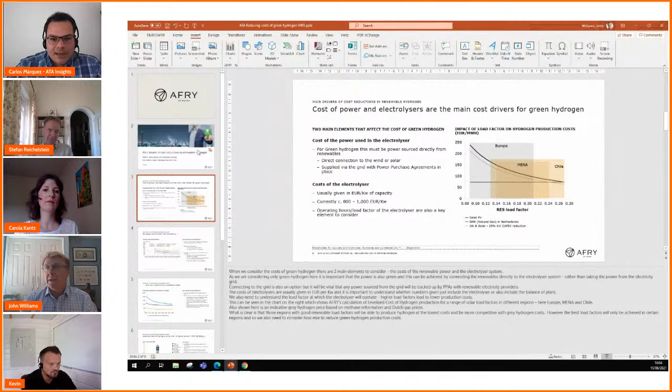Okay. I am just sharing my screen, so hopefully that should be coming through. Yeah, we can see, but we can't see the notes and everything. Yeah, sorry, my mistake. Here we go. That's okay. Okay, here we go. Okay. So, oh no, I've lost it. Sorry. Let me try again. My apologies. It's okay. It happens when you're live.

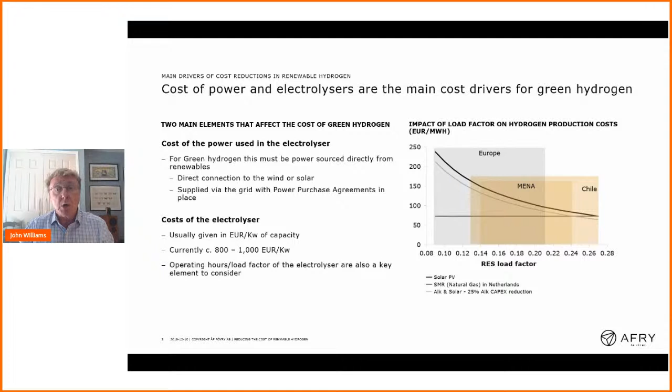However, it's important to remember that the best load factors will only be achieved in certain regions. And so we also need to consider what else we can do to reduce hydrogen production costs. So we expect electrolyzer costs to reduce steadily as a result of the scale up of manufacturing capability and improvements in technology and electrolyzer performance.

The chart you can see here, it's a bit busy, I know, but it shows our cost curves for alkaline electrolyzer capex reductions from 2030, alongside the assumptions used by others, BNEF, IEA, and the EU via the ASSET study. I included both our projections from Q1 and Q2 this year, which shows you how quickly our assumptions are changing as new information becomes available. Other types of electrolyzer, PEM and solid oxide, will have different cost reduction curves, and whilst more expensive today, should show steeper reductions in costs as those technologies develop.

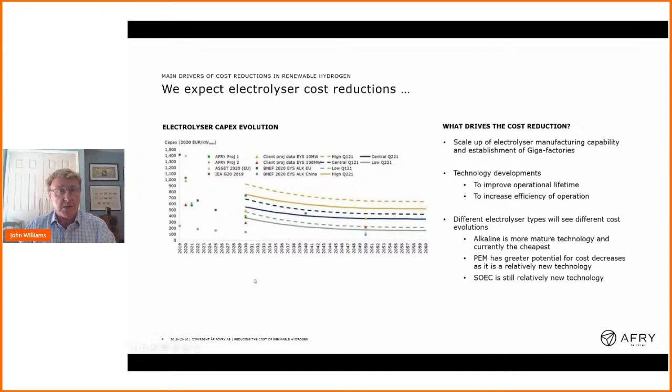So in addition to the electrolyzer costs, we also expect cost reductions in the capex required for renewables. Here we show our central scenario assumptions for solar, onshore and offshore wind out to 2060. The most significant reduction is in offshore wind costs, driven by a number of factors. Firstly, onshore wind is more established, so we've seen some of the cost reductions there already. The potential capacity increase for offshore wind turbines is greater; we've seen offshore turbines increase in capacity from 2 to 3 megawatts to around 14 megawatts today, and in future we might see increases up to 25 megawatts. We don't expect the same increases in onshore wind turbines, and currently expect those to top out around 5 to 6 megawatts.

Offshore projects are also likely to be much larger in scale than onshore and benefit from economies of scale. And also remember, it's probably easier to connect a single 1 gigawatt offshore project than ten 100 megawatt projects, either offshore or onshore. So with these reductions in mind, how can this affect hydrogen production costs?

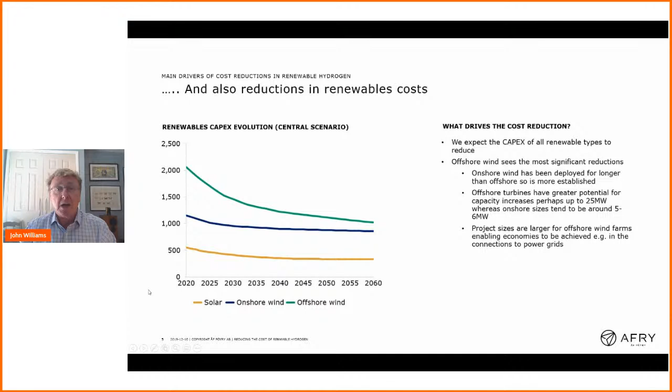Now, there are a number of factors that could affect this outlook. Firstly, we could see faster reductions in the capex and opex of both renewables and electrolyzers. We could see higher gas prices affecting both blue and grey hydrogen production, although we could also see lower gas prices. And higher carbon prices also affect particularly grey, but also blue to a smaller extent.

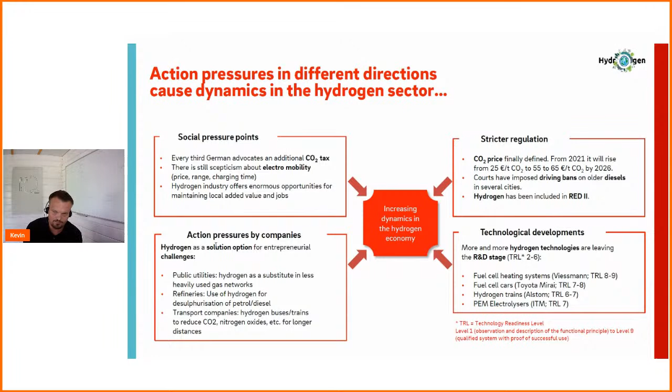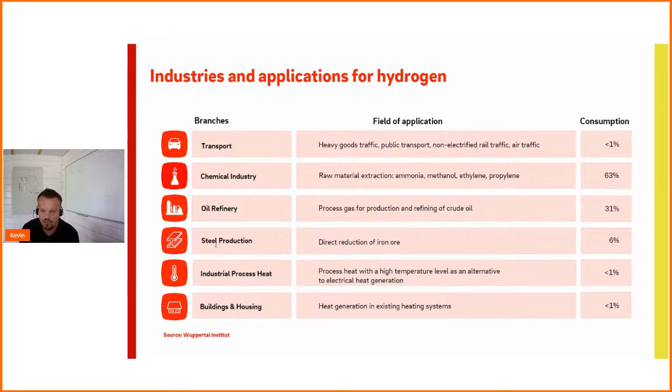Oil refineries, 31%, steel production, industrial process heat, lower than 1%, building and houses also lower than 1%. And this share will develop a lot, and we try to use hydrogen in the future also in all these different areas and enlarge it in the future.

I know that for Germany, but in other countries I think it's the same, that we have now a Corona stimulus package program, subsidy program, where the government will invest in a large funding program for hydrogen measures like electrolyzers, 5 gigawatt capacity up to 2030, carbon contracts. They will develop with this money the change in the steel industry away from carbon. And also in heavy duty transport, hydrogen is in focus.

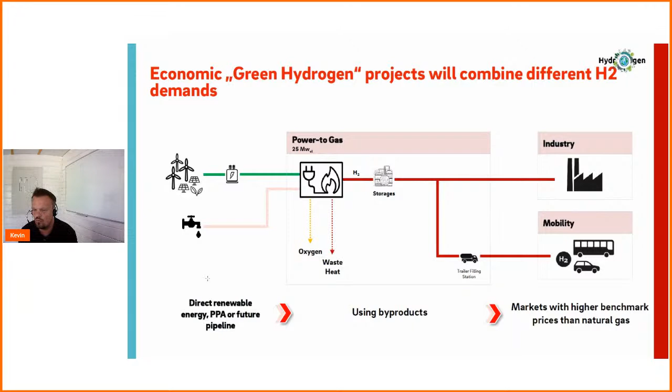And we see that the mobility sector is also very important, because the achievable prices and the higher benchmark prices of fuels are very important to drive hydrogen projects now, not in the future. And very important is also that in best cases we can use the oxygen out of an electrolyzer and also use the waste heat. And if all these surroundings fit in a project, we are able to develop hydrogen projects now.

So what kind of economic H2 projects will go live in this status? So we need CO2 sensible companies with a high customer pressure. We got feedback out of the markets that €4 per kilogram H2 is an acceptable price. Future upcoming higher CO2 prices and rules for industrial production will make H2 out of renewables more competitive.

Renewable energy nearby or payable PPA for lower OPEX is important. Then the H2 pipe I described, with cheaper produced H2, especially on the OPEX cost, from Southern Europe. Then using the byproducts out of the H2 process, oxygen, for example, in a wastewater plant, or for the burner primary air, or the heat in district heating grids or other applications.

Funding programs to reduce the capex costs, or we hope in Germany that we will also get funding for OPEX costs for H2 projects. And then in every case, we will see in the near future a mobility connection in the project, because they have the benchmark of 8 to 9 euros per kilogram, the business driver. And then what John also told us, future capex, especially reduction of electrolyzer costs and raising efficiency, is important to drive the projects forward. That was from my side.

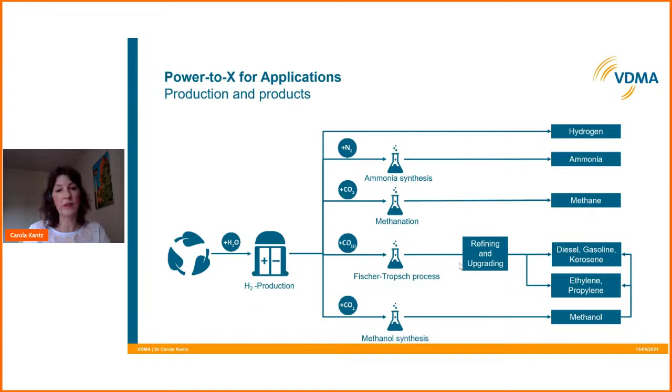And now hydrogen is very much reported these days. It's in the spotlight at the moment. And if you think about where you would like to use it, whether it's buildings, industry, mobility, there is always the question, well, where will all the hydrogen come from? Now, what I will do in my presentation is look at the supply side and the demand side, particularly focusing on the case of Germany.

As you may know, Germany has published its hydrogen strategy. It's been over a year now since they published it last June. And one of the main pillars will be imports. Germany is one of the countries where you don't have good opportunities to produce renewable energy, but we are very energy intensive. So what Germany will need is to look abroad for hydrogen.

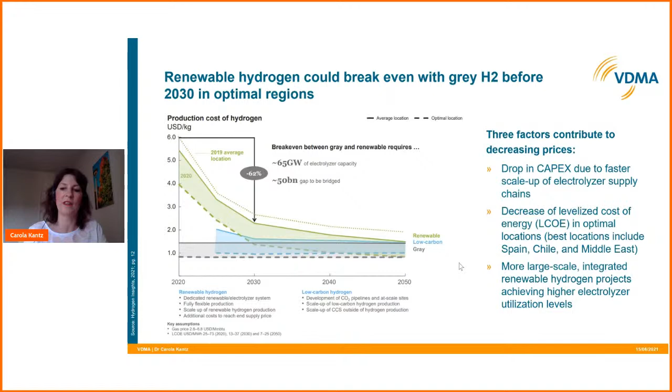So this is also the way that Germany will go. You've seen it in a different slide before. John told you all that, I don't think I should go into detail again. We think that renewable hydrogen could break even with grey hydrogen before 2030 in the optimal regions. Germany won't be an optimal region, but others will be. Obviously, the drop in capex will be very significant, and we see more large-scale and integrated renewable hydrogen projects along the line in the next 10 years.

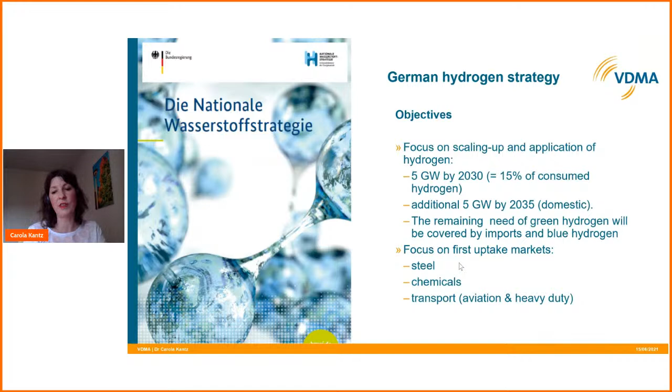Now, looking into what Germany is doing, Kevin already told a little bit about the German hydrogen strategy published last year. As I said, they focus on scaling up and the application of hydrogen. So the goal is 5 gigawatt by 2030, which is roughly 15% of the consumed hydrogen, and an additional 5 gigawatt by 2035. This is domestic hydrogen. Obviously, we will need more hydrogen in Germany, and this will be covered by imports and by blue hydrogen. And the first uptake markets will be steel, chemicals, where they will probably substitute the grey with the blue, and transport, here specifically looking into aviation and heavy duty based on renewable hydrogen.

What are the main instruments to achieve these goals? Well, first of all, we have implemented the Renewable Energy Directive. This is a European directive which Germany and all the other member states needed to implement. We now have ambitious greenhouse gas reduction targets, minus 25% in 2030. The government is incentivizing the use of green hydrogen in conventional refinery processes, so substituting the grey with the green. And we will have a 2% blending mandate in aviation by 2030. And this will not be hydrogen, but a derivative, so the power to liquid, the synthetic kerosene that Germany will use.

We also will have pilot projects of the so-called carbon contracts for difference for steel and chemicals. This is basically a contract between a company, let's say a steelmaking company, and the government. They estimate a higher CO2 price, and they will refund the CO2 price difference; it's basically an OPEX funding mechanism. We now have exemptions from the feed-in tariff levies for hydrogen production in Germany. This has just come along as the government is going into the summer break, and we are establishing international hydrogen markets. Just yesterday, H2 Global, which is basically a foundation organizing trades between the uptake markets in Germany and producer countries like in North Africa, was launched.

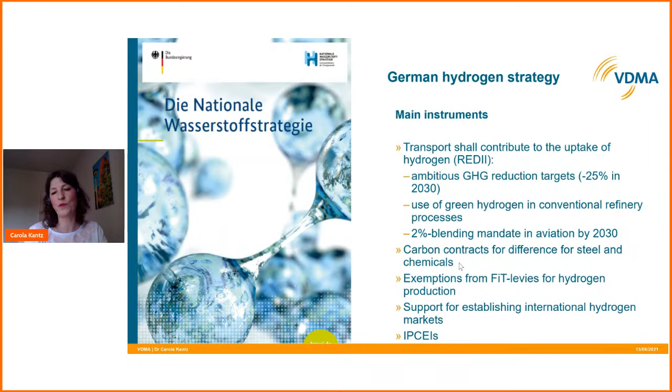And the last thing I would like to mention are the IPCEIs, one of the buzzwords in Brussels these days, the important projects of common European interest. Germany published its 65 hydrogen projects that are on the way and that will also be subsidized, just 2 weeks ago, I think. So I think there's much going on, and what we will see are a lot of emerging opportunities for the industry, also obviously for the mechanical engineering industry.

And so what we will see in the next decade is a significant market ramp up of green hydrogen production, not all in Europe, but also elsewhere. We will see the move from the currently installed base of electrolyzers, which is at the moment in the lower megawatt range, to gigawatt size capacities, which will then contribute to economies of scale and drive down the capex. We have an EU target, which is actually very ambitious, of 2 times 40 gigawatt electrolyzer capacity by 2030. And this alone indicates a market size of 40 billion euros within the EU only until 2030. So again, huge market opportunities.

The target sectors, as I said, are transport and industry. We think that e-fuels for the road sector should also play a role. But what we will really see is that power-to-X energy carriers, whether it's hydrogen directly or derivatives, will become an important commodity in the international energy markets. And so those regions with low electricity generation costs will take an opportunity as well.

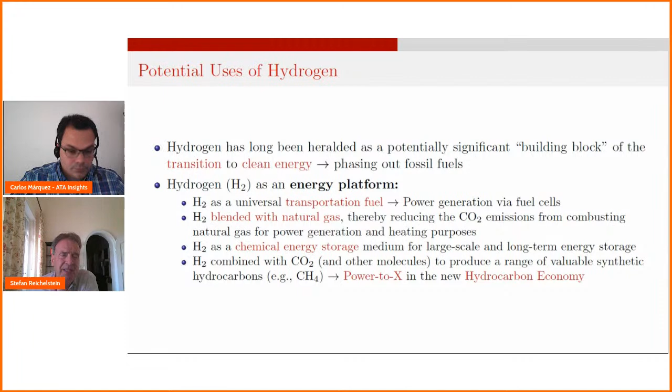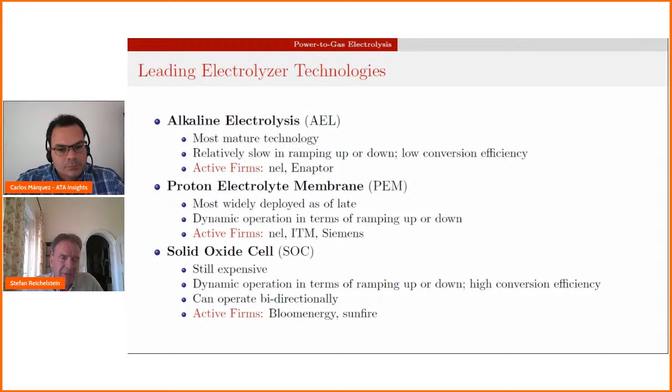other electrolyzer technology. If time permits, at the very end, I would also like to speak briefly about solid oxide cells, which to many are the new star in this arena with potential, though it's a little bit early to draw firm conclusions on that. Next slide, please.

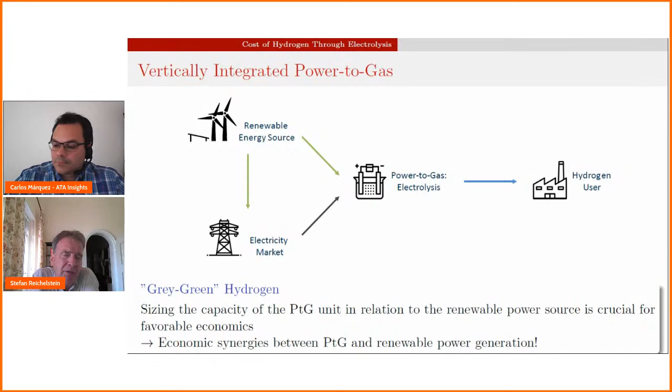So your renewable energy source, say wind in Germany, could also supply to the grid, or it could supply to the electrolyzer, and vice versa in times when your renewable source is not delivering much power. You wouldn't have to starve your electrolyzer because you could go in the other direction and rely on the grid.

So intuitively, this should indicate to you that it gives you much more flexibility in terms of playing on the price fluctuations in the grid. Sometimes it may be more economical to starve your electrolyzer and use the renewable power at times when it's scarce and feed it into the power market, and vice versa to go in the other direction.

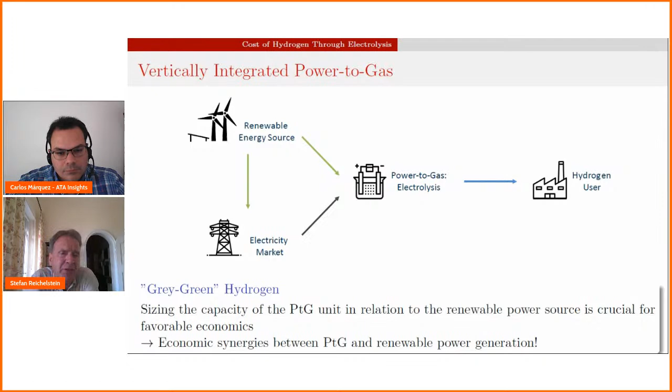Next slide, please. So that brings me to the determinants of the falling cost of hydrogen. We've talked about the system prices for electrolyzers. Conversion efficiencies are increasing, albeit not that quickly. But the other two items are really related to the variable, the operating costs of electrolysis. Number one, the average cost of renewable electricity is coming down. And the second part are these price fluctuations, of which we're seeing more and more in the wholesale power markets in various jurisdictions in the world.

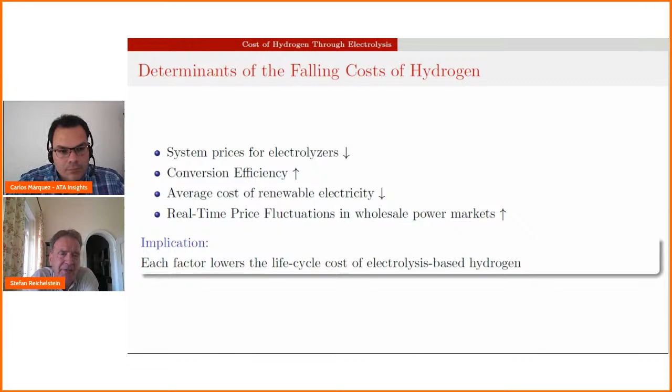Hydrogen, in particular, if structured in the type of deal that I showed you on the previous slide, is well positioned to absorb these price fluctuations and take advantage of that so as to lower the average cost of producing the hydrogen. So higher volatility in power markets is actually a good thing for the overall life cycle cost of electrolysis-based hydrogen. And one more slide, please.

So where does this leave us in terms of our estimates? If you're asking what are break-even prices for hydrogen in the current environment for, say, PEM electrolyzers, we've done this for Germany and Texas separately. And there are three markers for each of those two jurisdictions. The blue ones, the integrated ones, are exactly the system that I showed you. That gives you the lowest break-even prices. In other words, that's what an investor who wants to earn an appropriate return on the investment would have to sell the hydrogen for on average in order to break even.

And then the other dots are if you had only the renewable source. So that's what John, I think, originally talked about. If you really just wanted green hydrogen strictly, and you only connect your electrolyzer to a renewable source, it would make things a little less favorable in terms of the break-even prices. And the last item is what we call standalone, where the electrolyzer just interacts with the grid alone.

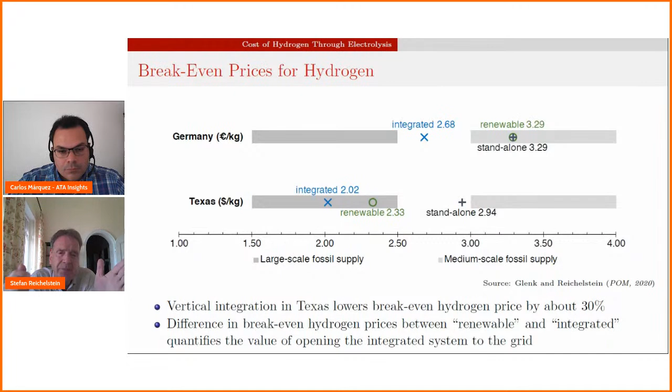So the key point is being able to play this price arbitrage game in real time with an electrolyzer that can ramp up and down very quickly improves the economics quite considerably. And I think I have one more slide and then I'm done. So what we're currently working on is moving away from PEM electrolyzers to take a look at solid oxide cells. As I mentioned at the beginning, they're probably the new kid on the block here.

What makes them particularly exciting to us is that they can work bidirectionally, and they can switch relatively quickly, in that you can use them like a traditional electrolyzer, but you can also use them as a fuel cell going in the opposite direction. At times when power prices are very high and you have a reservoir of hydrogen, you can go back in the other direction and supply additional power to the markets.

We have now simulated this system in the Texas market. Why Texas? Texas is probably one of the places that has the highest volatility of prices throughout the day and throughout the year. And as I mentioned earlier, that's a good thing if you have a flexible technology like that. And we're finding in the current environment, the price would have to be about $2.59 for a kilogram of hydrogen in order for these systems to break even.

On reversible power to gas in the form of solid oxide cells, I should also mention this is a new technology, so as they are increasingly deployed, we would expect the system cost to come down very quickly.